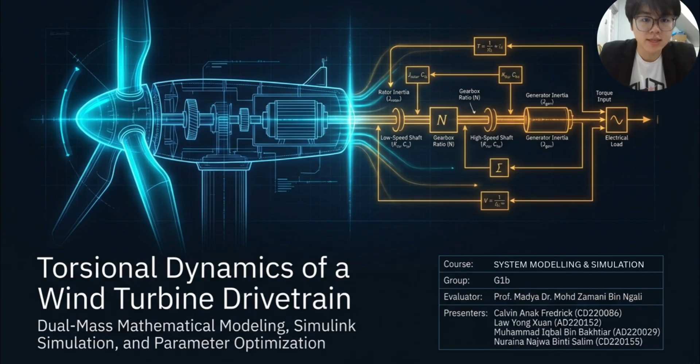So we are from group G1B, and here we are going to present our project for system modeling and simulation, BDI 40203, focusing on the torsional dynamics of a wind turbine drivetrain. Drive shafts are almost universally simplified as perfectly rigid links. However, our study highlights a crucial point, where utility-scale wind turbines fundamentally break this assumption of mechanical rigidity.

So we identified three primary factors contributing to this significant torsional flexibility. First will be the extreme geometric scale. The main drive shafts are incredibly long and heavy, designed to resist large forces, which naturally leads to elastic twisting along their length. Next will be the material elasticity. No engineering materials are infinitely rigid. Under the large torque generated by the large aerodynamic loads, even high-strength steel experiences a measurable elastic strain.

And last will be the component compliance. The internal components of the gearbox, such as gear carriers and flexible couplings, add an extra layer of structural give to the entire drivetrain. So the key takeaway and central premise of our project is that the drivetrain is not a single rigid rotating mass. Instead, it operates as a highly flexible multiple mass system. The wind for a wind turbine is rarely calm.

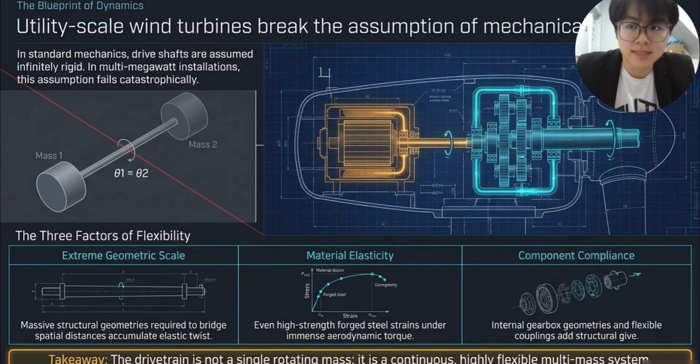The wind is inherently stochastic, turbulent, and unpredictable, meaning that the turbine rarely operates under perfectly steady state conditions. The most severe challenge comes from the wind gust event, which is characterized by a rapid transient rise in wind velocity. These uncontrolled oscillations cause two main engineering problems. First is mechanical fatigue. The continuous twisting and untwisting action creates localized alternating shaft stress, rapidly accelerating microstructural material fatigue and causing structural failure.

Secondly, grid instability. The transient disturbance causes the generator rotor angular velocity to overshoot its rated limits. Since the electrical output frequency and voltage are directly proportional to the generator speed, these mechanical fluctuations cause severe voltage flicker and also grid frequency instability.

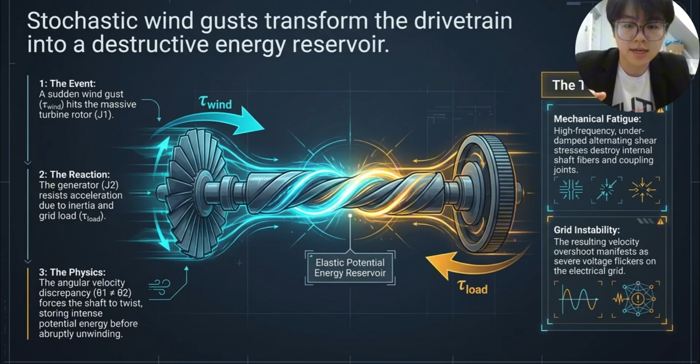To systematically address this dynamic challenge, our project follows a clear four-step analytical methodology. First, formulate. We begin by formulating the dynamic model using Newtonian mechanics. This involves isolating the individual rotating inertias and defining the internal spring and damper forces. Next is implement. We build the computational architecture for our model in MATLAB, utilizing a variable step continuous solver to accurately capture the high frequency transient oscillations.

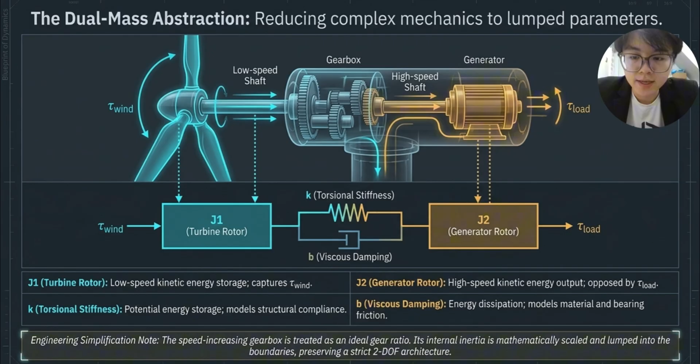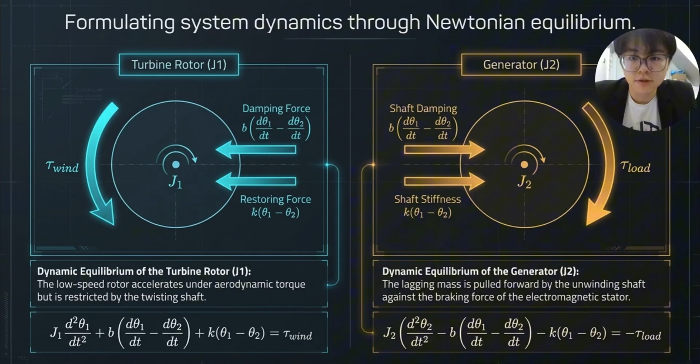On the right side is another equation, where this force pulls the lagging generator mass forward, while the electromagnetic field of the stator applies an opposing braking load. So the corresponding equation of motion for J2 is on the right. After we derive the two equations using Newton's equations, we use the Laplace transform to transform the equations into transfer functions, which is output over input. So these are the transfer functions that we get.

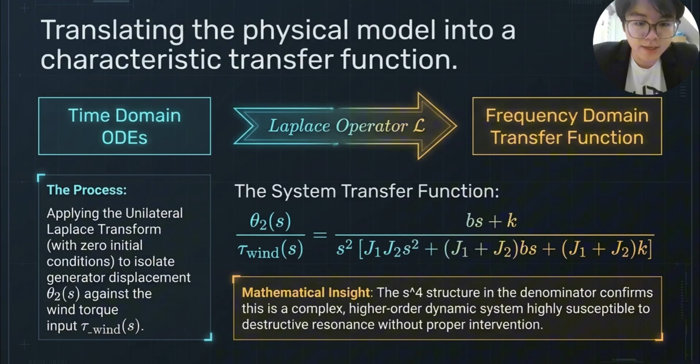Now I will present the computational architecture and baseline simulation parameters. This simulation is set up in MATLAB and Simulink environments utilizing ODE45, the Dormand-Prince variable step continuous solver, to capture high frequency transient oscillations over a 20-second time horizon. The baseline parameter matrix: turbine inertia 5 × 10^6, generator inertia 5 × 10^4, torsional stiffness 2 × 10^8, and viscous damping 1.5 × 10^6. So that's the baseline simulation parameters.

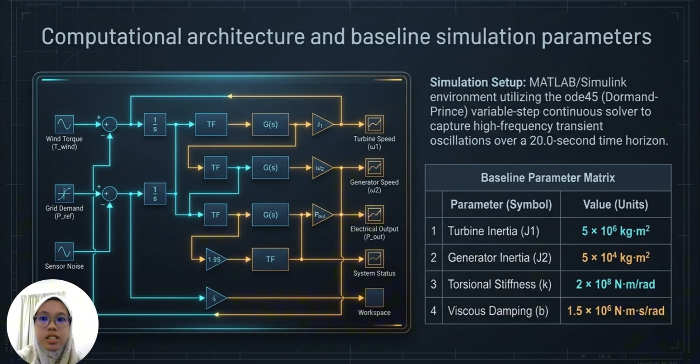Today I'm going to present the verification and validation, or V&V. Verification and validation is a process carried out to ensure that the simulation model is both mathematically correct and physically realistic. First, let's look at the verification section, which focuses on checking whether the mathematical model and numerical implementation are correct. The first verification is conservation of energy.

In this test, the damping coefficient B was set to 0. Without damping, the system should continue oscillating forever with no energy loss. As shown in the simulation, the oscillation remained constant and did not decay over time. This confirms that there are no numerical energy losses in the model, so the verification is considered successful. The second verification is equilibrium convergence.

As the simulation progresses towards steady state, the difference in angular velocity between the two rotating masses gradually decreases and finally reaches 0. This demonstrates that the numerical solution converged correctly to the expected equilibrium condition.

Next is the validation process, where the simulation results are compared with theoretical calculation and real-world behavior. For the momentum math validation, the simulated steady state angular velocity was 7.9210 radian per second, while the theoretical value was 7.9208 radian per second. This corresponds to only 0.0025% of error, which indicates an excellent agreement between the simulation and